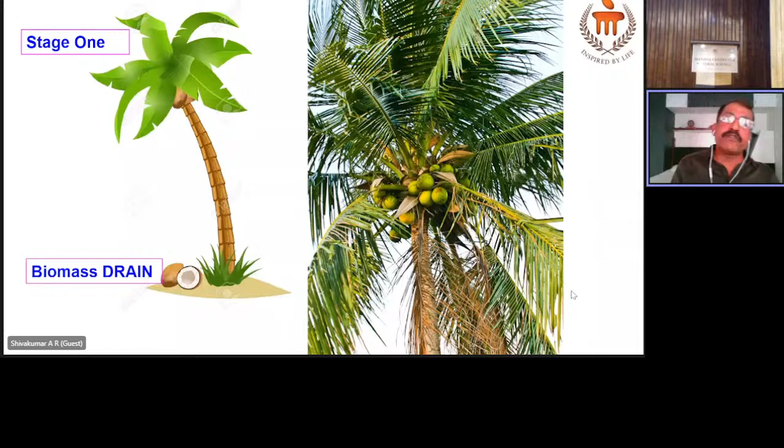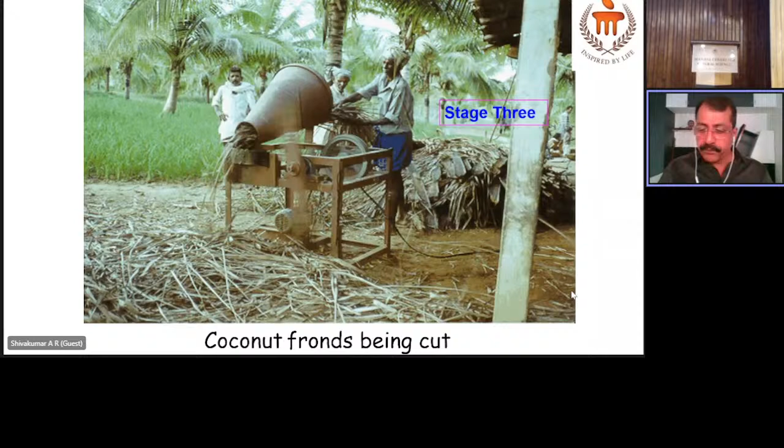Then I developed a frond shredder. Basically, it makes all these dry fronds into small pieces, and then the same material is spread around the tree. This is the frond shredder which is working, and we spread the shredded material around the tree so that the entire thing becomes manure for the tree and also conserves a lot of water.

This reduces water consumption because of the shade, and even the sun will not hit the ground directly. There's a lot of microbial activity, and the tree becomes more healthy.

The soil is rich again here. Most of your biomass is recirculated back into the soil. This is stage 4: after identifying the problem, developing a technology for that, field testing it, and then deploying it in the field.

And the 5th one, patenting. You have ample opportunities to patent and make it commercial. Of course, I patented this, but I never made it commercial. But you can find them across South India in most places which shreds, and the farms are thriving. I'll give another example.

This got me the national award: a low wattage, high efficiency water heater. Most of you know that geysers are the water heaters we have in our bathrooms. They consume, they need a connection of 2 kilowatt or 3 kilowatt. 2000 to 3000 watt is the heating load. I converted that into just 1/10 of that, a 200 watt water heater. This is the prototype you are seeing now.

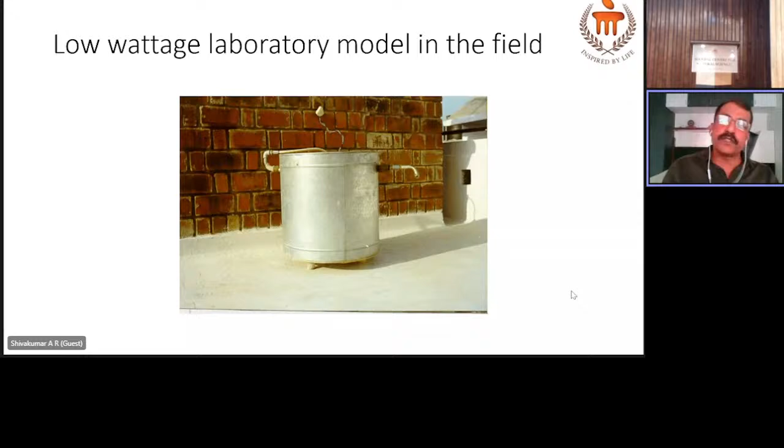What I did was, I found the technology to heat water with a coil, like the olden days of our Stone Age pot and fire at the bottom, where your heater is at the bottom. Why do you need the heater at the bottom? Has anyone worried about this? See, the thermal stratification that happens when you heat water in a container: the hot water goes to the top and cold water remains at the bottom. So if you have to heat the entire container of water, convection currents have to set in, and the entire container gets heated up.

Whereas in your bathroom, for your geyser or water heating vessel, you just need a certain quantity for a certain activity. For example, if you want to shave, you just need a mug of water. For baby care or something in a house, you need a couple of mugs of water. You can't heat the entire geyser water, which is 50 liters or 100 liters. What I did was I inverted that.

I introduced a coil from the top instead of from the bottom. Now what happens? The water gets heated up, and I introduced a sleeve around that. Only 1 liter of water gets heated up to around 60-70 degrees from 20-25 degrees, and then spreads at the top, and it will not mix back because the hot water is lighter. You have an outlet which comes out, and each time a liter of water reaches 60 degrees, and at the end of the day you have the entire water heated. That way you just need only 200 watts instead of 2000 or 3000 watts.

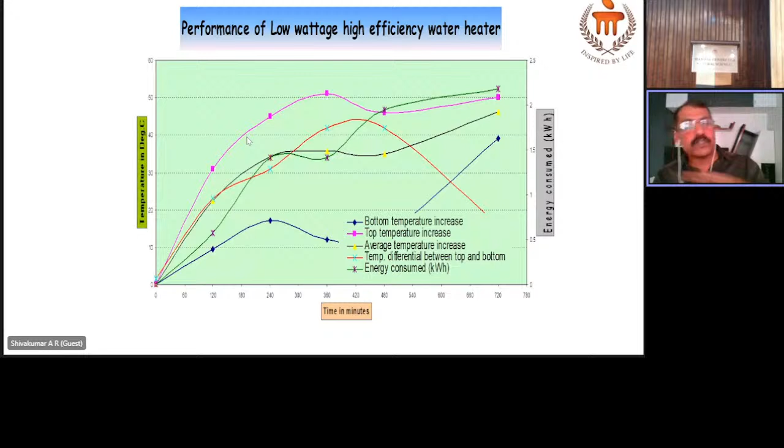Yes, this is the graph. Lot of scientific studies have been done. Thanks to the Department of Science and Technology, Government of India, it was deployed in the Himalayan region where sub-zero temperatures were there. 30 systems worked day and night with small micro hydro power plants, because there electricity is very scarce and lines cannot be drawn from the main line. So they have very small micro hydro power plants. From that, 200 watts has been supplied to each house. Instead of 10 houses having the power of the entire power plant, nearly around 100 houses are now getting the same usage in the Himalayan region.

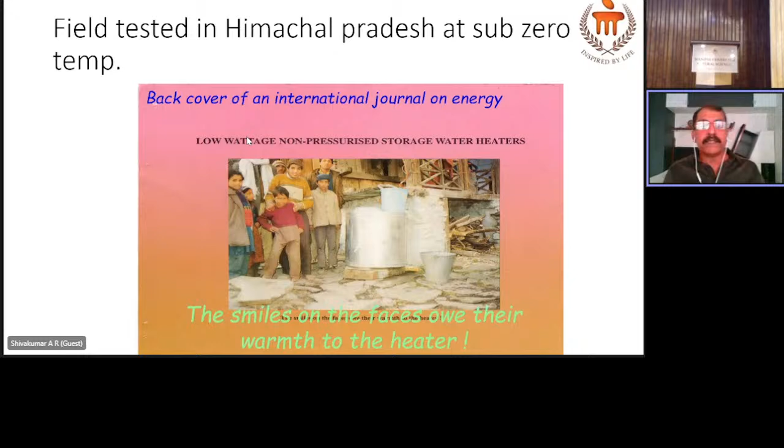Yes, coming back to water, pure water. Everyone wants pure water, zero bacteria water. If you go to any public place, whether it's a school or any other place, most of the time you have an RO plant built. Without knowing the cause or what the raw water requires for treatment, you deploy this RO technology and other such technologies, this reverse osmosis, where nearly 70 to 80% of the water is thrown as rejects and only 15 to 20% is reused back.

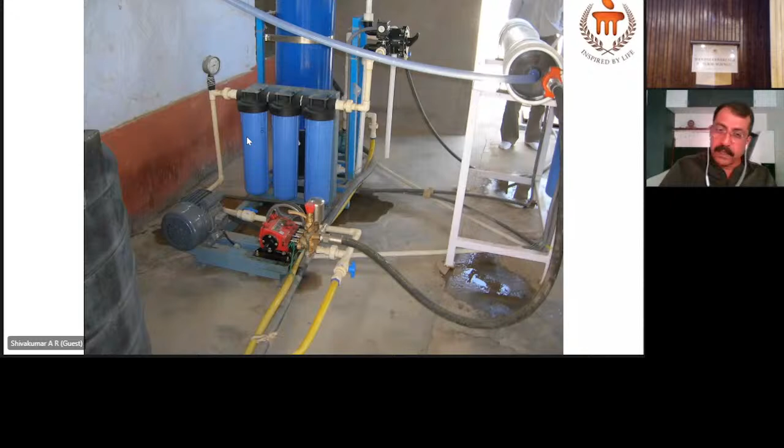Rainwater harvesting, pond water, well water, or river water just needs this technology. Again, thanks to the Department of Science and Technology, one of my innovations got funded for writing the protocol. A silver sheet can do the job. Dip a silver sheet, a very thin pure silver sheet, inside water. Wait for 10 hours. You can test that water in any lab. It is zero bacteria water. That's all the technology required.

And the silver sheet will not dissolve in water. There are no chemicals added to the water. The taste of water will not change, but I can assure you this is zero bacteria water. The same silver sheet can be used for 1 year, 10 years, 100 years. Nothing will happen to it because it will not dissolve.

Only thing is once in 4 days, you take it out, wash it in fresh water without soap or any other chemical, and put it back. That's all that's required. For your generation and the next generation, the same silver sheet can be used. We've been using the silver sheet in our house for decades, and many other people are getting zero bacteria water from surface water.

This is another innovation I did. Dr. Prithviraj was elaborating on the kind of water problems we have across the country, and rainwater harvesting is one solution to give free water at everyone's doorstep. Believe me, there's no GST for this, and it's a simple technology.

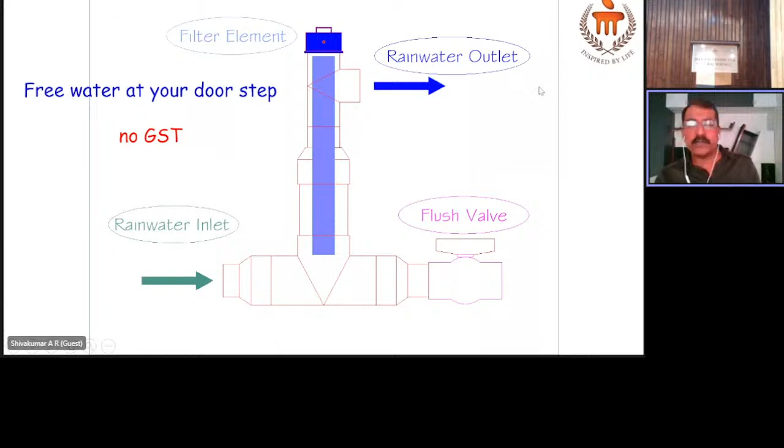It's a very messy affair, so I developed a wall-mounted filter called the pop-up filter. The roof water runs through this and travels against gravity upwards through a cartridge, and clean water comes out. There's a flush valve to drain all the dirt inside.

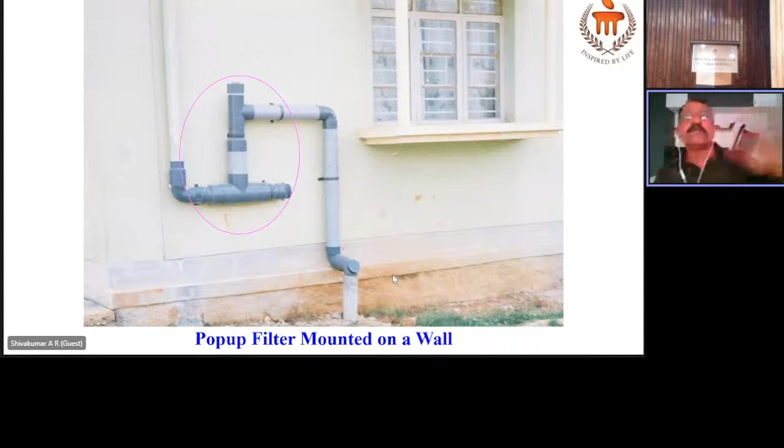This is the prototype we made. Thousands were deployed in the field to turn this into a product. Then a commercial product was developed, a modification so it could be conveniently used by anyone across the country. This went from the drawing board to a production model, and we tied up with a company in Gujarat that manufactured and supplied it across the country.

Rainwater comes through this inlet, and there's a flush valve that flushes for 5 minutes to clear dirt from the roof. Then relatively clean water gets filtered through a cartridge. This is the cartridge, and clean water goes into your sump and is stored there, which is what the sump is required for.

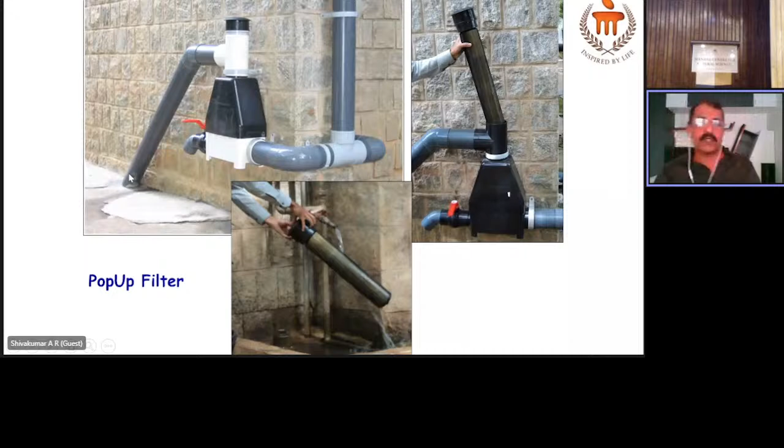When you have all these things on your drawing board and productionized, the patent and commercialization become very important. This is how you identify a problem and also provide a solution to society, while benefiting yourself too.

One more innovation I'll share. Each time I go to a public function where lunch or dinner is served, there's a table with a fresh white sheet spread on it as paper. Each time it used to prick me - what a criminal waste, I'd think. Can this white paper be put to better use? Hundreds of thousands of trees are cut for this. Is there a better use for it?

What you need is just a paper cover for serving food like plantain or bala. I thought, why not use newspaper for this? But spreading newspaper sheets side by side is a problem, and people may not like it. So I developed a charaka, simple like Gandhi's charaka, hand operated. A housemaid brings 1 or 2 kilograms of newspaper from the kabadiwala, places it on my small 3 feet by 3 feet charaka, along with glue made from maida.

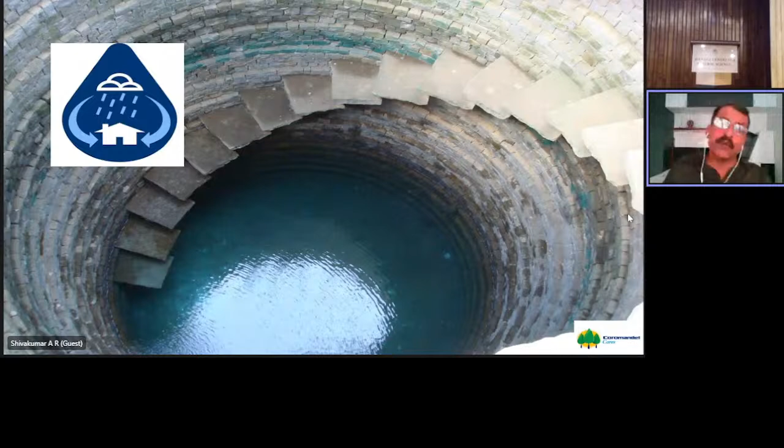In fact, such kind of wonderful structures, the wells, used to yield crystal clear water. Nobody bothered about testing the quality of water. We used to just drink like this, the crystal clear water. Because the concentration or the urbanization has taken over, many brought that well into this situation. The demand for water increased, and in the local area, the supply became scarce, and the pollutants and many other things started adding to the problem.

And boats and coracles were used for this. Hapless commuters, our techies in the Electronic City, were using coracles to reach their houses. This was on Hosur Road recently. Last year's rain flooded so much that several areas of Bangalore got flooded.

What is this water? This was the purest form of water when it comes down as rain.

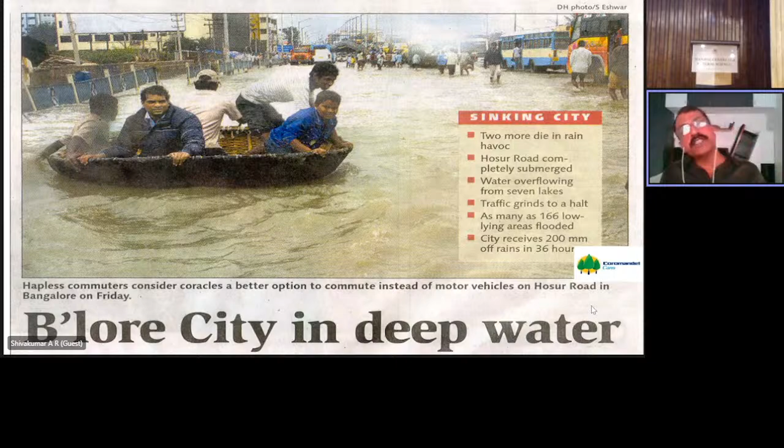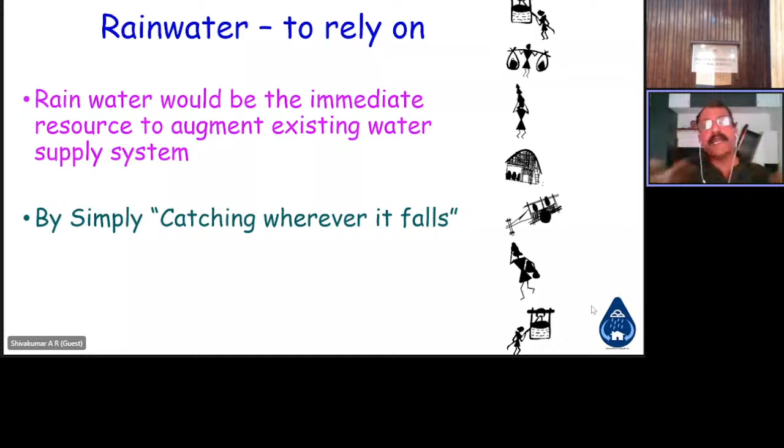How do we achieve that? Rainwater would be the immediate resource to augment the existing water supply system. I don't say that rainwater is the only answer - it can support the existing system by augmenting the supply. Simply catch it where it falls. How do we do that? Rainwater harvesting is as simple as this.

The rain comes onto your house, whether it's an inclined or flat roof. Instead of allowing it to go through the pipe and away from your house, collect it in a tank. But you cannot collect all the water because huge quantities will come and your tanks are smaller - you need to recharge into the ground.

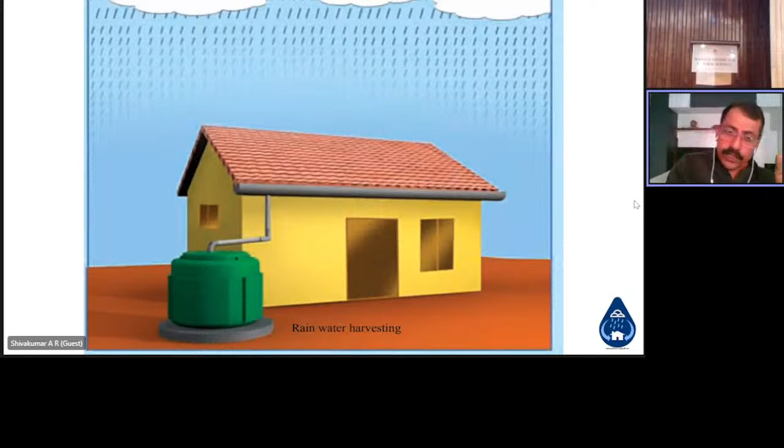This is like a fixed deposit. Mother Earth - whatever reserve we had from 2 to 3 decades, 30, 40 years - we have been pumping out water left and right from the ground. So the aquifers and the soil moisture have gone down. All these aquifers are dry. Why don't you put it back?

As simple as this - you have an abandoned old well, collect all your roof water and put it back into that. Lakhs of liters of water can go into the ground and it will come back to you. If not you, somebody else in your neighborhood will use it through their open well or bore well. If you don't have an old well, why don't you create one? It's very simple - like the soak pits of a toilet, just dig a hole, add cement rings, and allow the rainwater to go into that. That's all that is required.

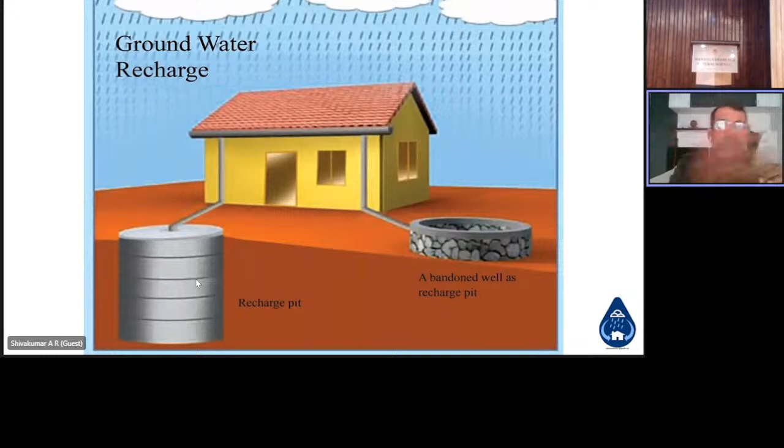If you want a proper system in your house, what you need to do is: you have a building, you have a downwater pipe, and rainwater comes down and goes away. You just install a filter and allow the filtered water to go into your tank. That's all rainwater harvesting is.

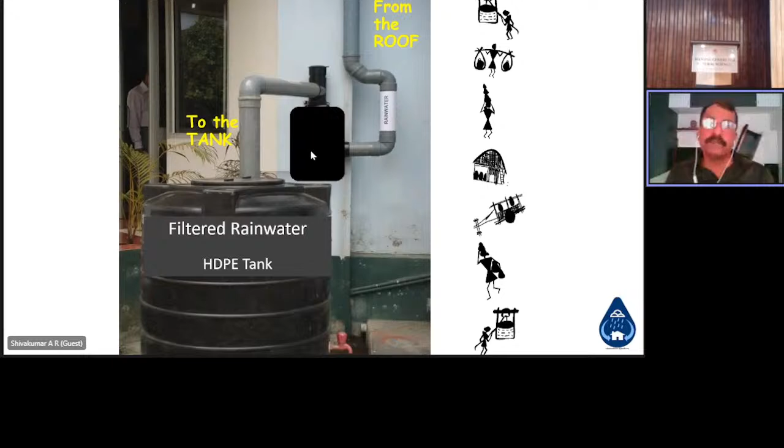Why do you need a filter? Because though rainwater is the purest form of water when it comes on your terrace, you have dust on the terrace, bird droppings, and leaf litter. You need to avoid or separate these undesirable things from the water and store it after that. So these filters will help. This is one of the filters which I have developed.

And how do we do that? As simple as this, the next 3 slides will tell you in a nutshell everything about rainwater harvesting for your house. You have a house like this, with a roof and a downwater pipe. Now when it rains, the water flows out and goes away from your place.

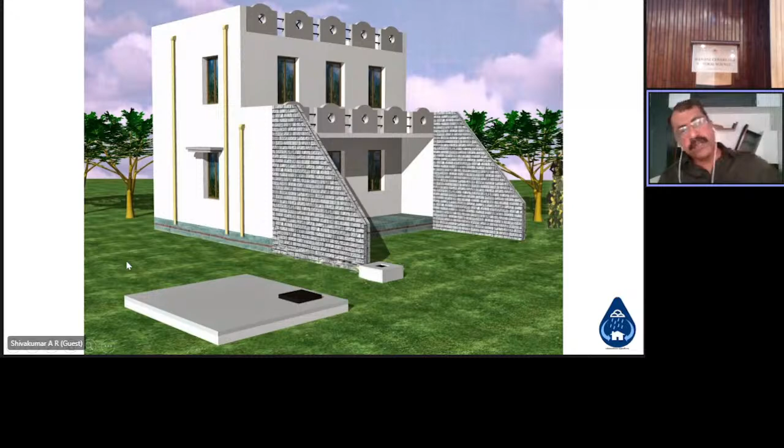Can we connect these pipes together? Yes, anybody can do that. Take a length of around 3-inch or 4-inch pipe, 90mm or 100mm, with an elbow or T-joint, and just connect it. After that, you install a filter. There are different brands of filters available, wall-mounted filters—not necessarily what I have designed.

The roof water comes through this pipe and gets collected in the main pipe. Then it gets filtered. After that, divert that filtered water into your sump, existing sump, or tank. Most houses are built with a water tank because we don't have 24/7 water supply, so we cannot connect the city, town, or village supply directly to a kitchen tap and expect water throughout the day. Because of that uncertainty, all buildings have an underground tank and an overhead tank. So allow your rainwater, after filtration, into that. That's all rainwater harvesting is.

How much does it cost? You have your building roof and the pipe. You need an extra length of pipe to connect, and a filter, which costs around 5,000 rupees. The pipe costs around 2,000 rupees, plus labor of another 2-3,000—so 10 to 12,000 rupees, or maximum 15,000. That's rainwater harvesting for your house.

If your house is big, you can bring water from the other side with a similar system and store it. That's all rainwater harvesting is—rooftop rainwater harvesting, a simple first step. Everybody can do it, each one of you, and also spread the message to all your neighbors.

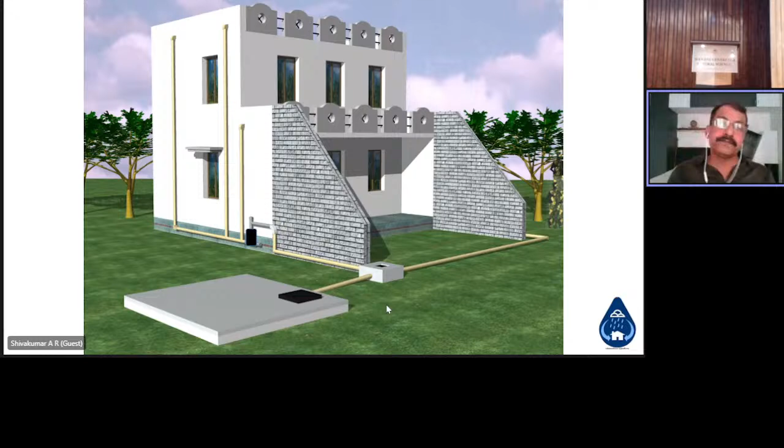How does the filter work? It's a very simple filter which I have developed. The roof water comes through your downwater pipe, enters this filter, and there's a flush valve. All the rejects get flushed because there's an automatic arrangement, and clean water comes through the cartridge and then goes into your sump for collection. It's very simple and very easy to install on your wall.

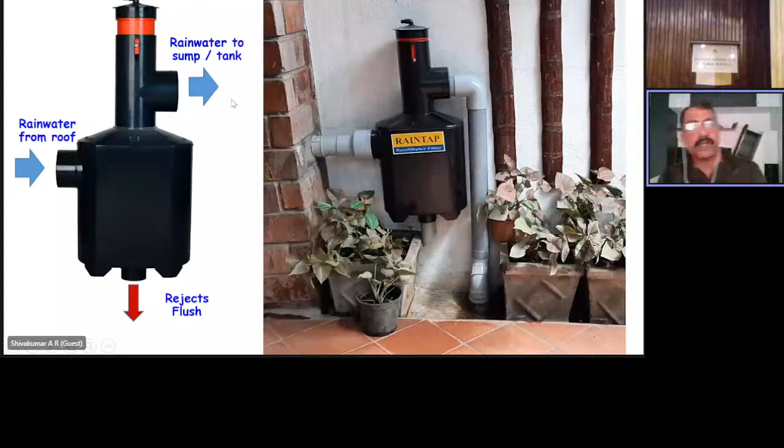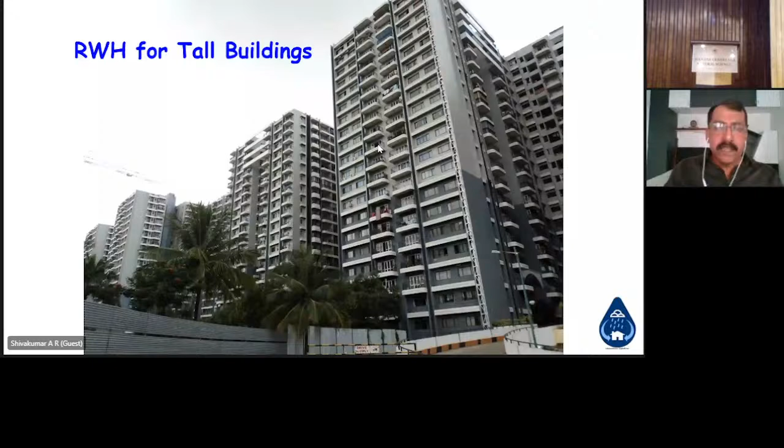And this is for large buildings. Thousands of buildings in the city and many other places—we have built rainwater harvesting systems for this. Here, instead of having a filter for every pipe or maybe 2-3 pipes, you cannot use such small filters for large buildings. There's a collective filtration system, or high-volume filtration system, which I have developed. Here, all these pipes use the natural gradient in the landscape to bring water to the lower portion, and at that place the trunk line which brings water from all your roofs can be handled.

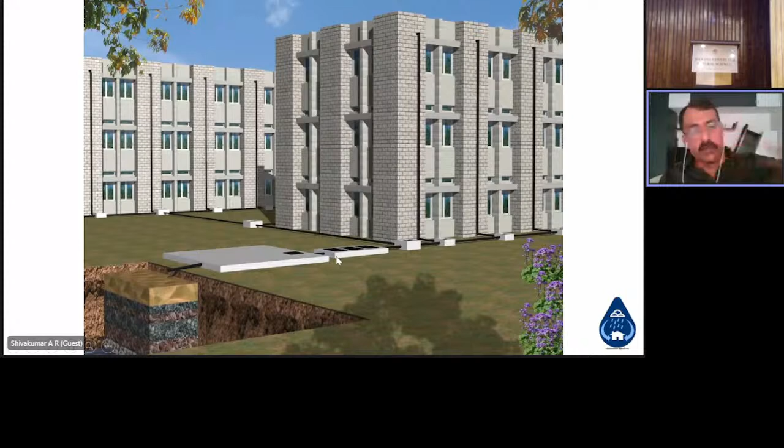This filter works so that every time it rains, the first 2 or 3 minutes of water gets diverted for groundwater recharge, since it contains contaminants like bird droppings, dust, and leaf litter. After that, the crystal clear water that comes will go through a pebble bed filter into your sump. That's all that's required. You have a large building with many such pipes—bring all those pipes together, and there's a high-volume filtration system which I have developed.

After filtration, the water goes here. This doesn't need any maintenance for years, even for several years you don't need to do anything. Every time it rains, the first few minutes of water gets separated here, and afterwards the valve automatically closes and goes into this, and we have crystal clear water.

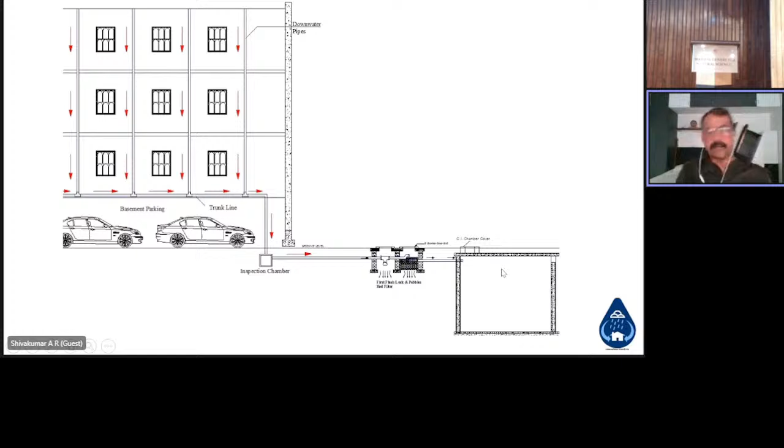This was tried 15 years back through the State Council in Bangalore. We developed rainwater harvesting, and I was instrumental in developing this for many such buildings. Earlier the pipes were like this. We interconnected all those pipes in Vidhana Soudha and brought that large pipe outside because we could not create a storage place inside.

Vidhana Soudha is such a good heritage building, and there's not a single rainwater pipe outside it. They are all inside the building in the courtyard, so our challenge was to bring the water out. We brought it out at different corners through large pipes and filtered it in a high volume filtration system which I developed. Hundreds and lakhs of liters of water are stored below this garden area in huge sumps that are built, and that same system is still in use.

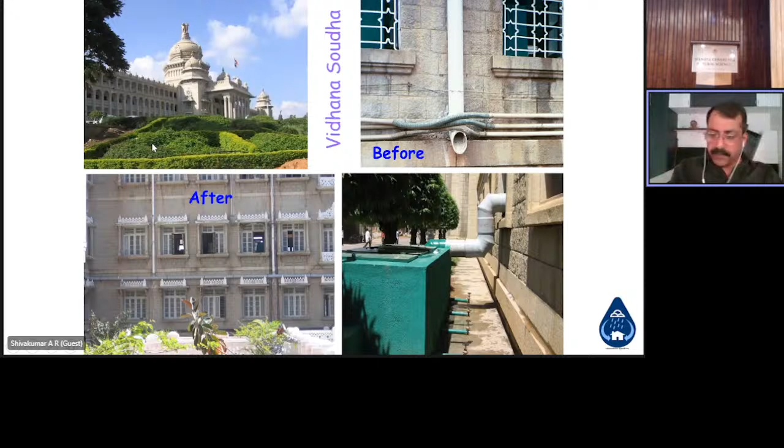There are many examples, like the High Court building, which the British built in Cubbon Park. The rainwater pipes are inside these pillars. We traced those pipes through the basement, collected and filtered the water, and then started using it.

Hundreds and thousands of industries are now harvesting rainwater. We have given them the technology. Now they not only harvest water, they use it and also sell the excess water if there is any.

These are some unique examples I can show you. For instance, BWSSB, the Bangalore Water Supply and Sewerage Board, which supplies Kaveri water to all Bangaloreans, has large tanks like this storing Kaveri river water. These are called GLRs, ground level reservoirs, where the Kaveri water is stored after chlorination before distribution. We designed a rainwater harvesting system for even these structures—the roof water of these tanks is collected and mixed with the rainwater too.

There are several programs across the country which I have done. I was even an advisor for the United Nations Development Program. This is somewhere in the Himalayan regions, Uttarakhand, where we showed them how to use rainwater for drinking purposes. These are very high mountain regions with no water source. When it rains, a lot of water flows down through the valley and goes away. Unlike the plain areas, there are no tanks, wells, or lakes that can yield water, so the water source is very scarce. Even if you try a borewell, you cannot drill—even at 1,000 feet you don't get water there because of the very steep mountain range. So they have to walk kilometers down and carry fresh water back on their backs.

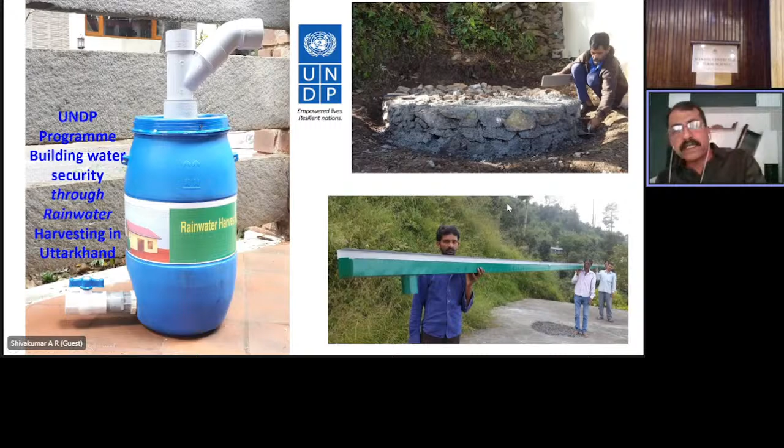So what we did was harvest rainwater from their own roofs—we guided, trained, and educated them on how to build gutters, build filters, and store this water using locally available material. These are some of the training programs where I transferred these skills to local people to harvest rainwater from their own buildings. There are champions doing this across the Himalayan belt and also the northeastern states, like in Sikkim and other areas. You can see the roof water collected, filtered, and stored in a tank, giving them fresh water for drinking.

Not only in these exceptional areas—you can do rainwater harvesting anywhere. Wherever there is a building, an open space, a large office building, or a software park, rainwater harvesting is something we need to do, because rain is free and it's the purest form of water. Wherever a house, institution, or commercial place exists, there's a lot of demand for water. So since both demand and supply are there, why not try to utilize and match this?

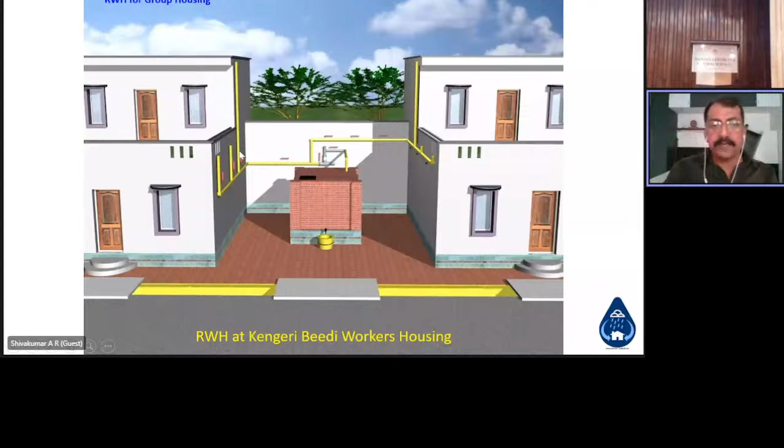We did this experiment in the Kengeri Beedi Workers Housing Camp through the Indo-Norwegian program, where I was the program manager for the state. We took these small government buildings built for Beedi workers, a small slum-like settlement, connected all their roofs, filtered the water, and stored the rainwater in a tank. A very dirty place became a good place for them to collect water from the roof and start using it. You can see the smile on their faces—each time it rains they collect pure water for drinking, whereas otherwise they would use highly polluted water from nearby lakes and other places.

This is rural Karnataka. The previous speaker was telling about the water problems in the rural areas.

84% of the Karnataka water supply through the rural water supply system is through groundwater, borewell water, deeper borewell water. 84% of that water is contaminated with fluoride and other contaminants. We said there is an answer for this. That fluoride borewell water, you can use it for secondary purposes. What you can do is generate your own water, the roof water, use it through a sandbed filter and store it in a tank, and you can definitely have fresh, clean water at your doorstep.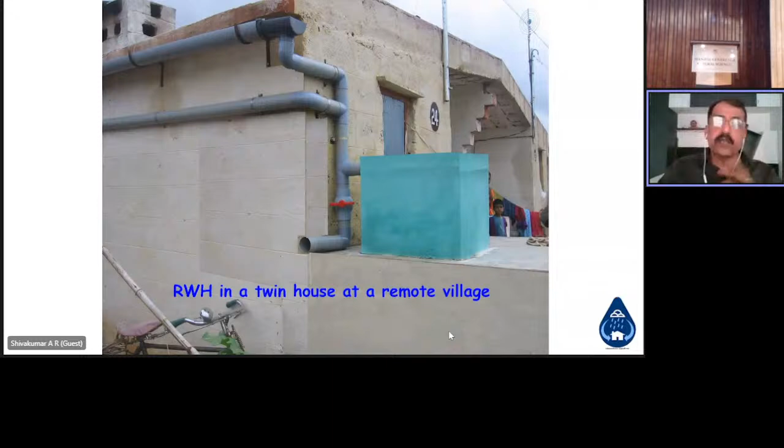I'll tell you, this is the happiest family which I can see. This is somewhere in, I think, Koppal or some place, in a very dry place. They generate their own water. We built a system through some government program, RDPR, Rural Development and Panchayat Raj system.

The gutter collects the rainwater, comes through this pipe. There's a first flush valve, which we have asked them to use to separate the first 5 minutes of rain. Then it goes through a sandbed filter, and there is a tank which is totally sealed. Don't need to open that. And there is a tap here. This gives rainwater, the purest form of water. Each day they collect 2 pots of water.

Nearly, I think it's 9 years old. From that day till now, this tank has not gone empty at all, because every day they take out only two pots of water for drinking and cooking. This is their house, this is a kitchen, this is a washroom, that's all.

Next time when we went, they were so happy to show us, and we saw that this tap had a lock. They're securing water much more than what they can do for their jewels or any other thing, because that's more important for them, and it has given them more liberty, better health. From that day till now, they don't have any water problem, and they're using this water for drinking and cooking. No other treatment required. In fact, it is free. They don't have a water bill to pay. And as I told you, there's no GST for rainwater.

You can also do that. As simple as this. Best practices: educate the public, educate the children.

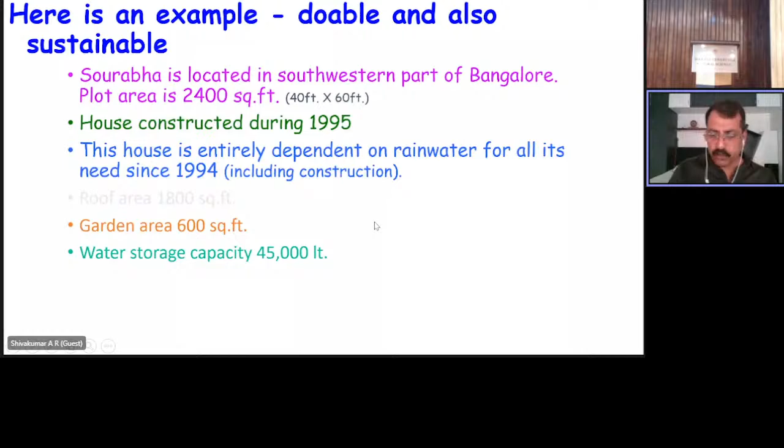This is called a zero energy tank, zero energy water tank. The first floor roof water comes into that after filtration, and that gets fed to the entire ground floor in the rainy season without being pumped. Zero energy, free water, rainwater. Excess water comes into large sumps, gets stored, and when it overflows, it goes into the ground.

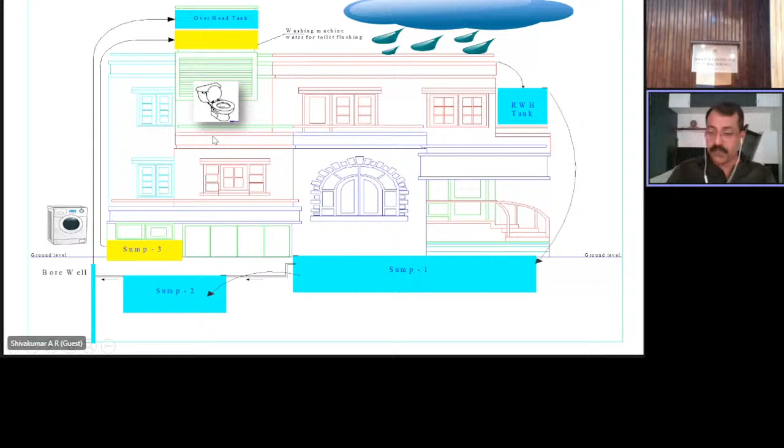A plot of 40 feet by 60 feet in Bangalore gives 230,000 liters of water in a year, whereas a family of 4 people needs only around 1.5 lakh liters, or maximum 1.8 lakh liters. Yet they have no outside water supply, and the excess rainwater they put back into the ground for groundwater recharge for others to use. They also reuse this water, because conservation is also important and reuse of water is one among them.

These are the tanks. It looks like any other normal house, around 45,000 liters of storage, because the tanks need to be bigger since it doesn't rain every day. Whenever it rains, you need to collect more water. Around 400 liters per day they use, and throughout the year they have no water problem, because this 45,000 liters is calculated like this.

The dry days between two successive rains is 100 days in Bangalore. Those 100 days you need to have the storage. After that, there is another rain, it starts filling your tank, and you will have fresh water to use.

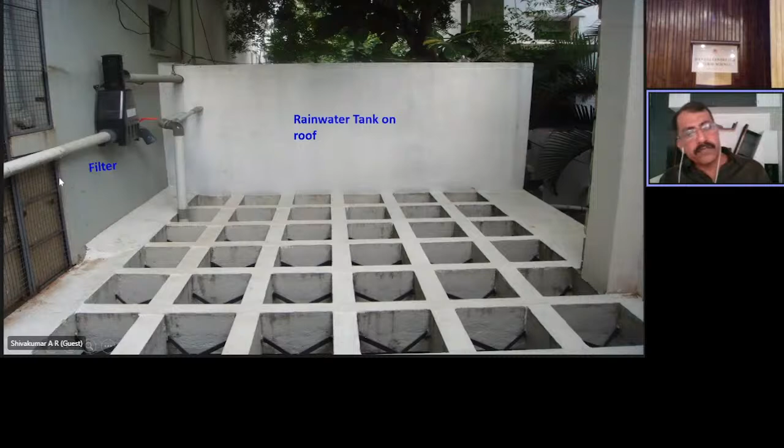This is their roof water tank, where the first floor roof water comes, gets filtered, and then goes into this tank for storage, and they use it in the ground floor without being pumped. The excess water from this pipe goes into the underground sump to collect. They also reuse the water which comes from the washing machine for toilet flushing.

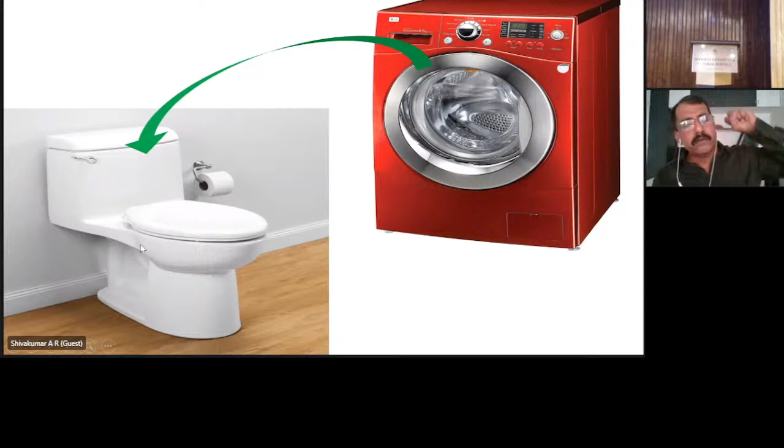When I did a lot of experiments, I found out the largest single use of water is toilet flushing. In any house, nearly 40 to 50% of your water goes down the drain to just flush your poo. Very sorry to say, the crystal clear drinking water goes through this flush. Why don't you use this water instead?

Believe me, these washing machines are there in almost every house nowadays. The water coming out of the washing machine after laundry cleaning is just soap water. Why don't you use that water for flushing? Soap water cleans your toilet better than fresh water. In fact, it already has detergents. So that's what this house did.

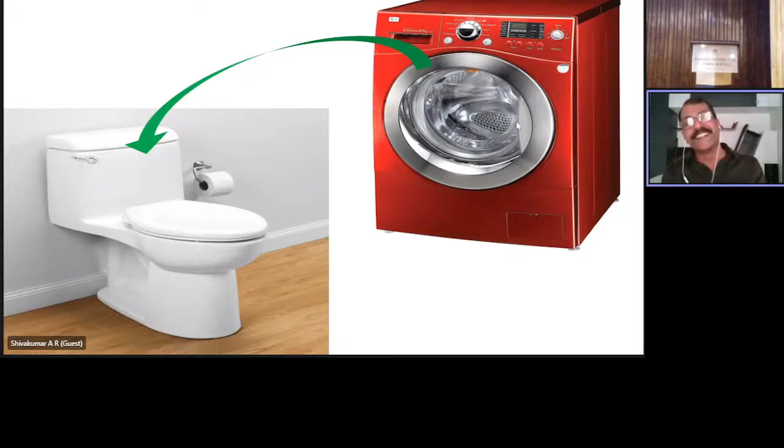What they did was connect the washing machine outlet to a small tank, a sump. From there, they pump it out for treatment, because if you use the washing machine water directly for flushing, it's no problem, but if you store it, because of oil, grease, sweat, and so on, it starts smelling as it degrades. So you need to treat it.

How did they treat that? Very simple: they have large drums on the roof which have vetiver grass. The detergent or washing machine water comes through this, and all the organic matter gets absorbed by the plants. It goes through the aerator, gets stored here, and then is used for flushing.

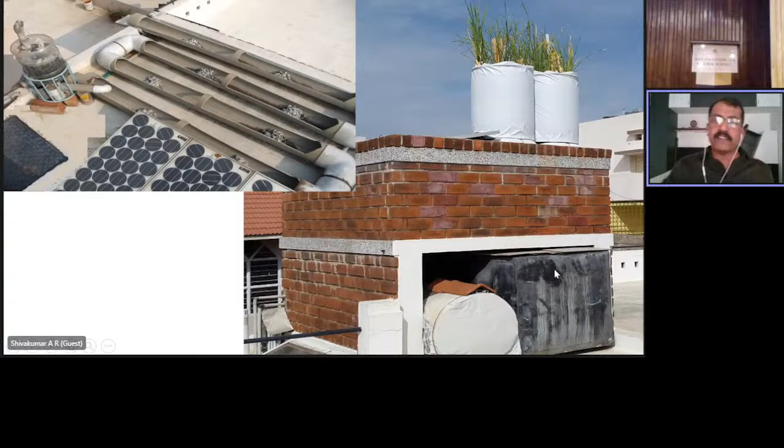You can see the luxurious growth of this plant, around 8 feet of growth. You see this in most of these polluted lakes, where there's luxurious growth of these plants. That's what is happening here. Every 4 or 5 months, they harvest this plant and they have clean water to flush.

Your kitchen is a good example for conservation too. Kitchen sink water, after washing your utensils, vegetables, fruits and so on, please don't drain it down the drain, because if you use that water for your plants, it's a good way to save water, and also your plants become healthier. You know why?

This is masala water, what you are giving. So the plants are also better off with masala water. Like how you like your masala, plants can also enjoy it, and a lot of water can be saved like this.

In fact, this house has many other nature-friendly activities besides water conservation, because I'm coming closer to the sustainability angle of today's talk.

Each one of us generates a lot of waste every day, especially organic waste. If you throw it out, there are a lot of problems. Why don't we reuse that inside our premises? Like this house, what they do is use earthworms which feed on organic waste to convert it into manure. All the kitchen waste and paper goes into this earthworm pit. Hundreds of earthworms eat all that and convert it into manure, which becomes a lot of greenery around them.

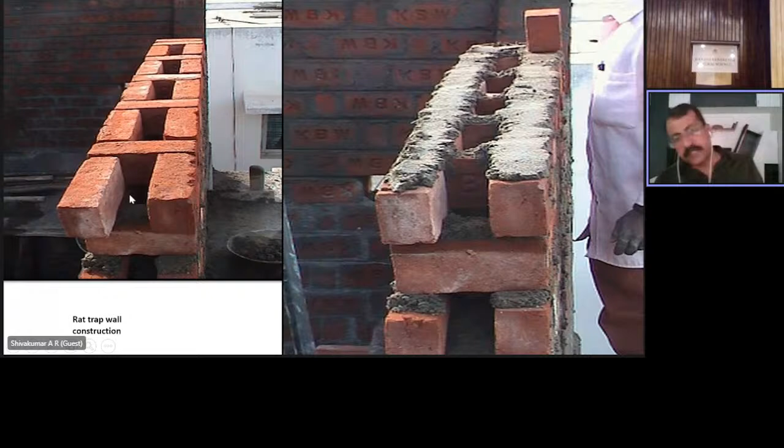They have made nature work overtime, but they have not abused it. So nature is providing all the help for clean, dust-free, cool air inside—no AC or fans required. Clean, pure water from rain. Sun provides the required heat, solar lighting, and many such things. And that way, nature—earthworms, beehives, and fish—all these things act to see that they get support from nature for all the requirements of the house.

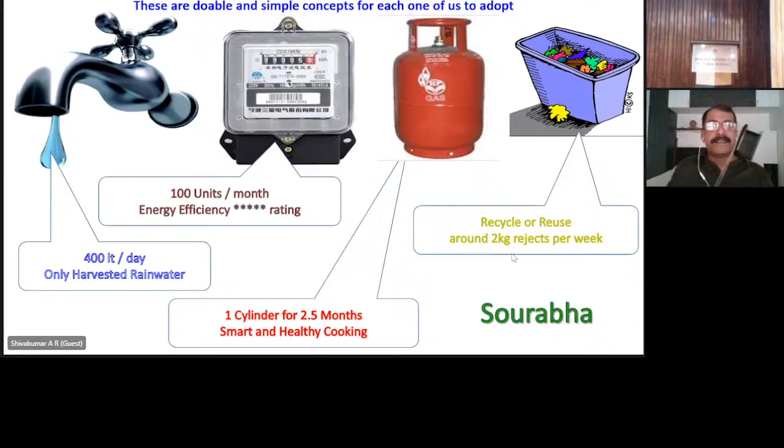Rainwater harvesting can be as simple as this. Each one of you can follow this if you have the will to do that. And I wish you all the best to practice most of these things and be an innovator, to see that simple problems of society can be solved, and you have a solution for all these things. All the best to you.